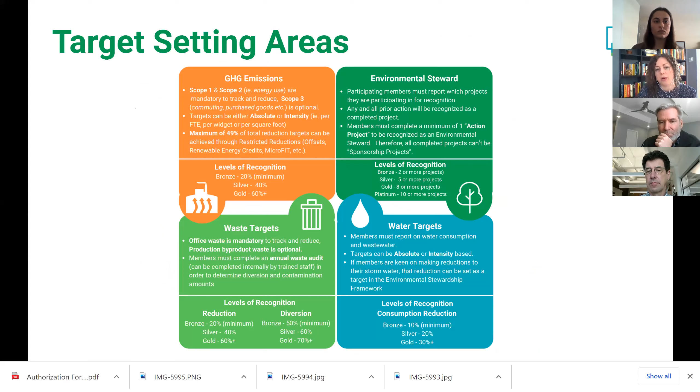We've gotten a lot of funding to help organizations implement sustainability projects. We've completed 50% of our membership's baseline setting, which is basically our biggest goal is to help people track their emissions and set a baseline and then improve the impact. So we're proud of that as well.

We've helped people install and implement a lot of sustainability projects over the last couple of years as well. We've started an employee and volunteer engagement program where it's a month-long deep dive into the 4 different categories, one target per week, and we help employers communicate the sustainability goals that they have with their stakeholders.

What brought us here today is that we implemented a green project grant program where we got some funding to help organizations with their goals. And then we were able to give out the money and the opportunities, which included 2 water conservation blue roof feasibility studies. And we chose Pillar Nonprofit Network and the London Food Bank to receive those studies.

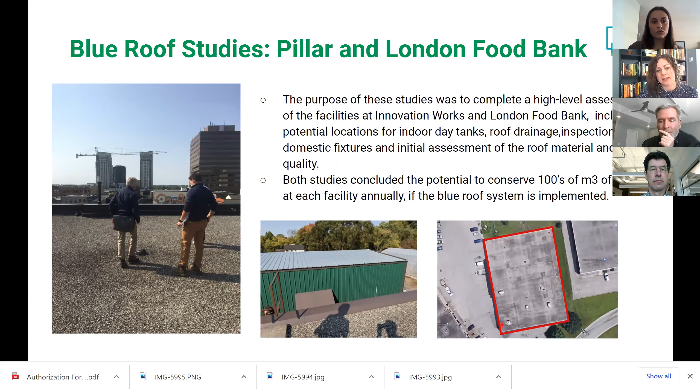So we did have these studies done, and I'll let Bruce talk more about those. But that's where we were at with our water program. So if you'd like to follow any of our projects, you can check us out.

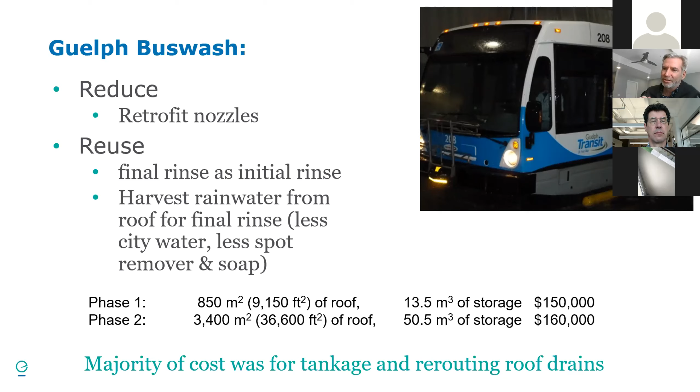When you're storing on the roof, you can actually get it to go down one drain instead of all the drains to where you need it. So you need less piping indoors and less tankage. It's an opportunity to reduce a lot of the cost of rainwater harvesting.

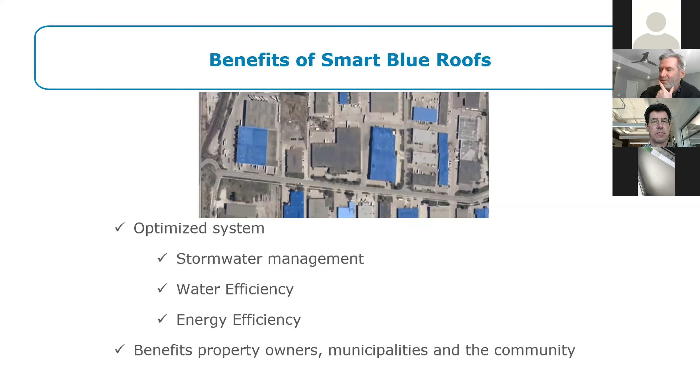So here's where blue roofs - and I'm going to use Credit Valley Conservation as a case study to explain some of these concepts. There's potential stormwater benefits, water efficiency benefits, even some energy benefits, and I'm going to go through a bit of that. As a starter, interestingly, the Intact Centre is funding part of that demonstration project that we're doing for CVC, actually building a demonstration one there.

Why is the insurance industry interested? Well, the insurance is interested because the leading cause of personal claims is now water damage, and it's doubled in the last decade. Here's a chart on it. What's happening is we're getting larger storms more often - you might get a 100-year storm every few years, so it's not a 100-year storm anymore, it's just a storm. So what happens is all of our infrastructure was designed based on what we used to get. Now we're getting maybe the same rainfall, but in more intense, shorter periods, which overwhelms the distribution pipes, collection pipes, and results in flooding.

So interestingly, if we can slow that down so it's not going down the drain during the storm, then rather than digging up all the pipes, putting in bigger ones, or taking somebody's land and building a big pond on it.

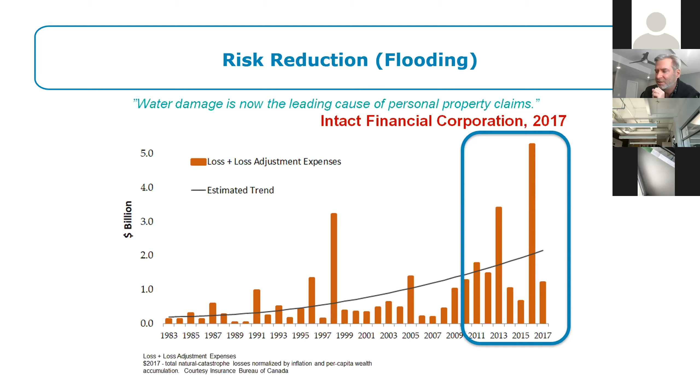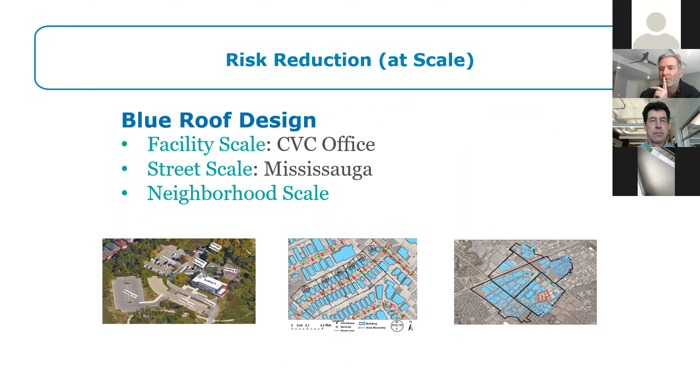Just by lower cost infrastructure improvements, we could potentially address the problem at the source. So we're assessing for them, and we're actually building it on their head office, shown in that picture on the left. We're also evaluating it at a neighborhood scale, where 13 businesses are sharing the same overloaded storm drain. What if we were to collectively work on those? Can we address that at a community level? And then you could look at even larger scales if you want.

There are two different ways you can go: one is called passive blue roof and one's active. Generally speaking, passive is you're just slowing the water down going down the drain, so it's not going down at the same pace, and it builds up a bit on the roof during the storm, continuing to drain afterward, and generally over 24 hours it's all gone. Active blue roof is where you literally store it on the roof. You put a valve that closes on the drain, and we'll get into what that entails for roof design. But literally, you're storing it on the roof, and that gives you a lot of flexibility.

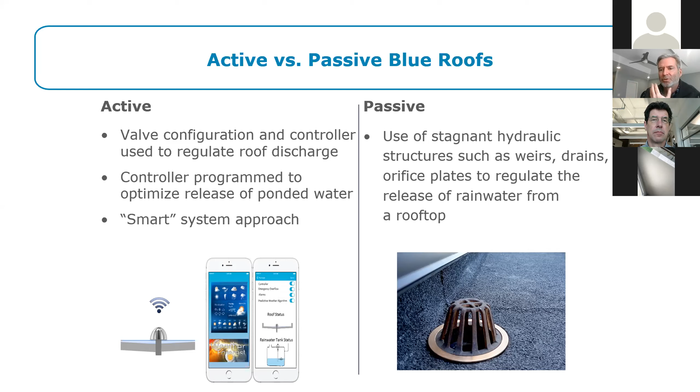First of all, you get a lot more water to use. Second, you can say, hey, there's a storm coming, let's make some room on the roof. We're going to open the valve and drain the roof, right? So it gives you a lot of flexibility. They call that an active or a smart blue roof.

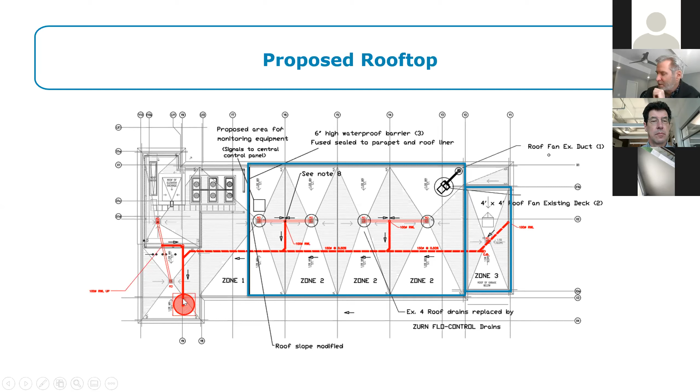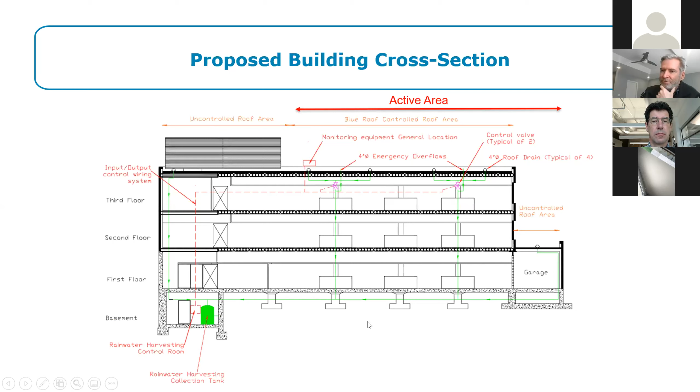And it's going to end up in the storage tank in the basement. So here's a side view: basically you've got some control valves here, which allow you to keep the water on the roof until you want it. Here's your rainwater harvesting tank in the basement, which already exists—they've already got their toilets tied into it. This would give them more water so they'd have to add less city water to make up the difference. As this tank calls for water, it just opens a valve, tops up the tank, and keeps going. And if you need to clear the roof, you can just open it up and drain it to the town's storm drain before the storm occurs, when there's more capacity in those pipes.

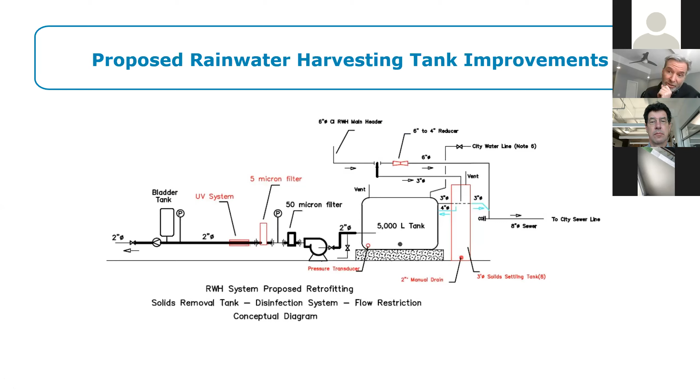As for the water itself, it comes in, you might settle out some debris first and then store it. Before you use it, you might treat it with ultraviolet light or chlorine or something like that, then use it in the toilets. Interestingly, we don't have to make drinking water out of it—we just need to make toilet water, so it's a lot easier than the level of treatment you'd need otherwise. This is in detailed design right now, and it'll be tendered soon for construction, most likely this year.

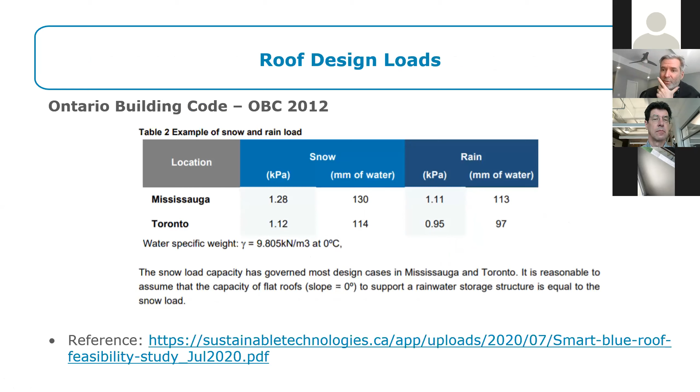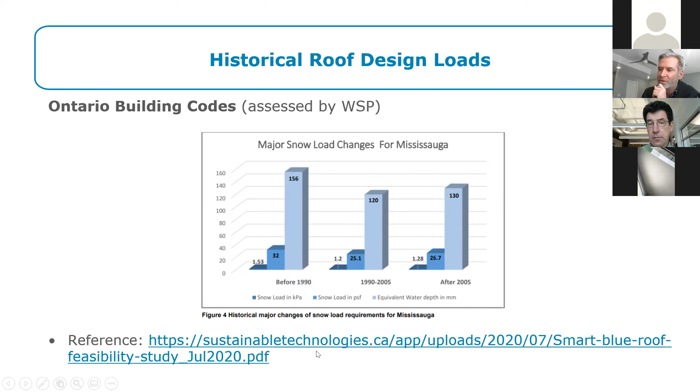Basically, 120 millimeters during this period is the low point—it was actually stronger before the 90s. So even 120 millimeters, 12 centimeters, means 10 centimeters of water would be less than the building code allows. So what happens is, in the wintertime, we would actually drain the roof, so you've still got your snow load capacity, but during the shoulder and summer seasons, you can store water. And if there's a big storm coming, you can just make room on the roof. There's a nice report, and in this recording, hopefully you'll have slides you can click on to get to the site—this is the feasibility study for that project that Credit Valley Conservation made.

Another consideration would be mosquitoes. Aren't we going to grow mosquitoes on the roof? Anytime you've got ponded water, right? Even in your own backyard you want to be careful of this. So you have a screen on top of your rainwater barrel, that kind of thing, to avoid this.

If you look at the life cycle of a mosquito, the eggs can last for a long time, even in a dry environment. Once they see water, within 2 or 4 days they hatch into larvae. The larva has to be in water, and it takes 5 days before it becomes what's called a pupa, and then another 3 days minimum for it to become a mosquito.

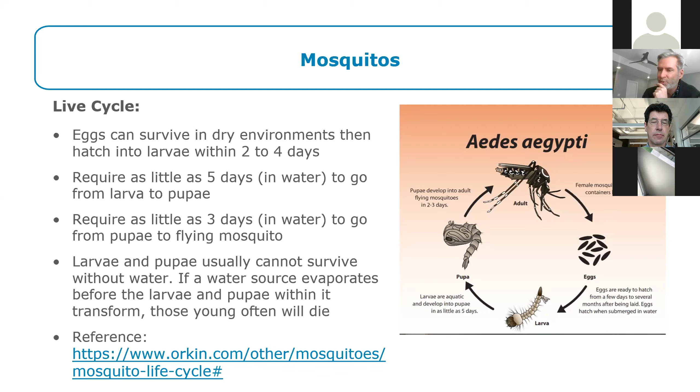So there's 8 days. If we were to ensure the roof drains at least once a week - let's say every Friday at 5 o'clock you open the valve and drain the roof, let it dry out for a day or more, close it again and start storing - any larva and pupa would be killed. It's kind of where that goes.

Another interesting thing is cooling. If you go on a roof in the summertime and touch the liner, you may actually burn your hand, that's how hot it is, because the sun's beating on it. If you go to an outdoor pool and put your hand in, it's not going to be hot, it's going to be like low 20s at best, because once you get above that you get more evaporation, and that evaporation cools the water down.

So you could potentially keep your liner closer to 20 degrees than 40 degrees or whatever it's going to heat up to, which I think may have some benefits in terms of the life of the liner, because the cooler it is, the plasticizer and everything in there would last longer, in my opinion.

But also interesting for the building: if you have a 40 degree Celsius liner and a 25 degree building, the heat is going to go from that liner through the roof into the building. If you have a 20 degree liner and a 25 degree building, the heat's going to go from the building to that water, so the opposite direction.

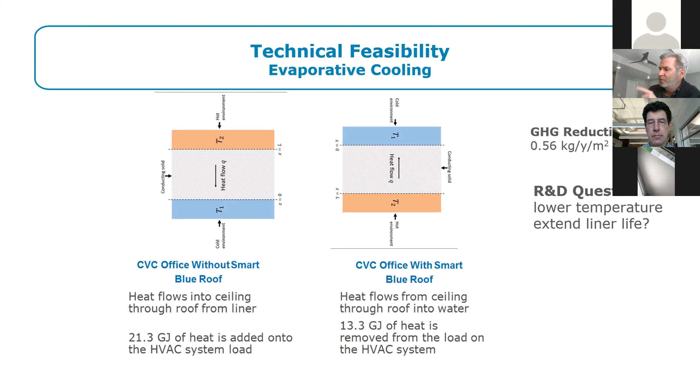If you look at that swing, 21 gigajoules one way and 13 the other, that comes to 34 gigajoules of energy. Your building's refrigeration or air conditioning system is fairly efficient, it might move 3 units of energy for every unit of energy you put in. So if you did that, it's still a certain amount of electricity you'd save on your HVAC units - not a lot, but it might be significant.

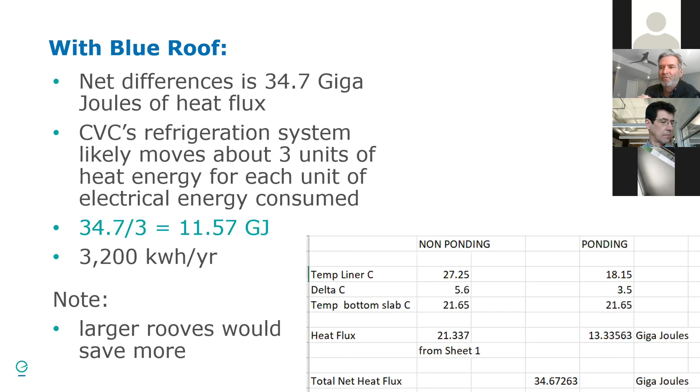And also, if you don't have refrigeration, it might give you a little bit of a cooler environment for your workers in your building. The larger the roof, the bigger the benefit.

Now some specific case studies from London. The food bank is in London, and they actually have a garden, which is really nice, planting trees and that kind of thing. This is their roof - they have a little rainwater harvesting tank in the top right there, and they fill it up about a cubic meter a week. They bring a truck for that gardening, so they're paying somebody to haul that in, which we could potentially avoid if we harvest their own rainwater.

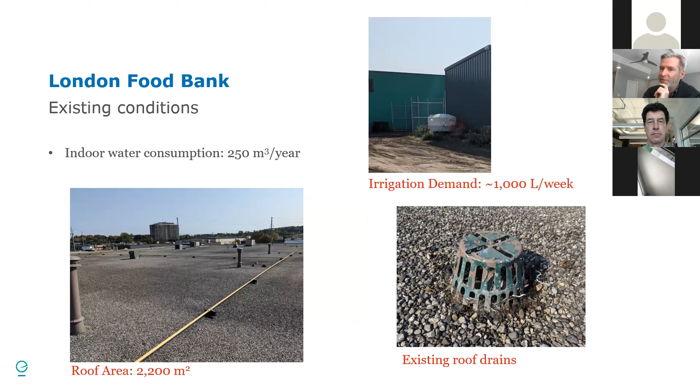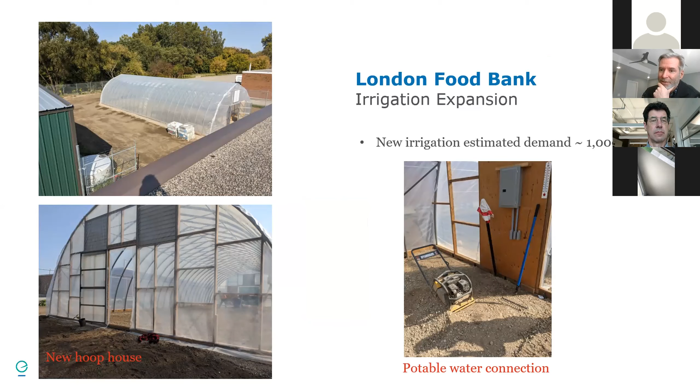Also, they're building this hoop structure, an indoor greenhouse. Rainwater is perfect for growing plants, so what if we were to harvest that? Basically what we want to do is, there's the two roofs there - the north roof, that's that little tank I showed you. If we put gutters on here, we can have one tank here, another one here, because they also have trees they're trying to do out here, basically just harvest the rainwater from that peaked roof.

The main flat roof here isn't good for a smart blue roof yet because of the type of material, so we're considering a passive blue roof, basically a slow release, capturing some of these drains inside and getting it over to that greenhouse so they can have a storage tank there that fills up whenever it rains and use it on the plants.

On the right here is a software program we use called Connect the Drops to model rainwater harvesting systems, and then we jury rig it to also address blue roofs on top of that. The blue bars show how much of the actual water demand they can satisfy, and the hatched part is what still needs to be met with other water sources.

Such as city water. Interestingly, before you start reusing water, it's better to reduce it in the first place. By changing the fixtures in the food bank, we can actually save 100 cubic meters a year of water, whether it rains or not. On top of that, if you put a passive blue roof, you'd save an additional 70 cubic meters. If you're able to do an active one later, say if they replace the roof liner, you could get in the realm of 230 on top of the 100.

Innovation Works is in downtown London, 201 King Street. It's a nice old building, 4 or 5 stories tall. Similarly, its roof isn't ready yet for a smart blue roof, so at this point we would only consider a passive blue roof. Later on, at some point in the future, you may put on a modern roof liner, and at that point you may want to consider converting to an active blue roof, but most of the infrastructure in the facility would already be set up.

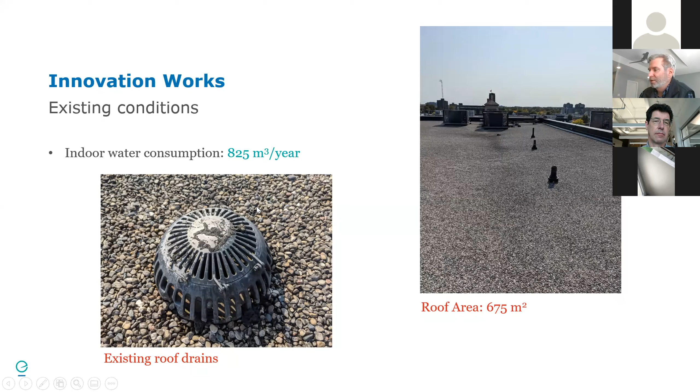Indoor water consumption, they're presently consuming that much a year, but through conservation we could save about 300 cubic meters a year with fixtures and that kind of stuff. Then if you do a passive blue roof in those two locations, you could save about this much. And if you convert it to active later on, you could save a total of that much more on the blue roof reuse side of things.

From a stormwater modeling perspective, this is the instantaneous amount of rainwater going down the drain during the storm that can be avoided, which has a lot to do with sizing of the storm pipes and flooding risk. Through water conservation there's this kind of savings available through the buildings, and through reuse with the blue roofs there's these kinds of things available, plus you get a small amount of savings on cooling in the summer months.

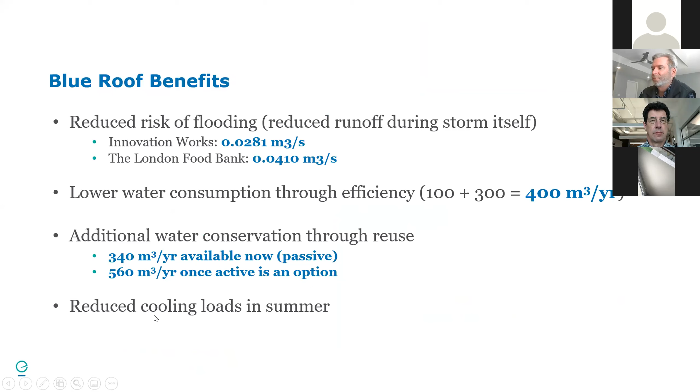So what I want to do is throw it open to Q&A.

We've got a couple of questions so far in the chat for you, Bruce. Some you might have touched on, and I think one of them might be better suited for Richard, but we'll go through what we got. The first one was, how large and how small can a roof be to be supported with this system?

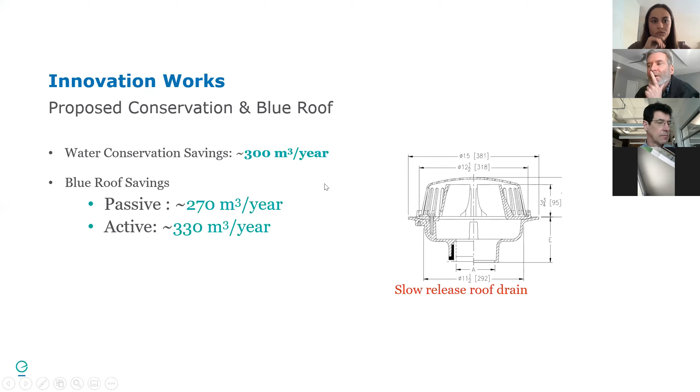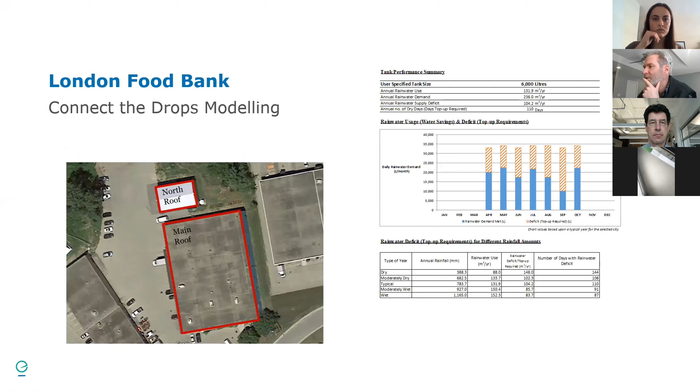Well, our own office is 5,000 square feet, and we're going to put one on our own office in Elmira, and we already have the rainwater harvesting like I showed you. So you can start small. The drain pipe literally went through my office, and we just started by buying this tank and elbowing in a tank and overflowing down the same pipe. That's pretty small, and we didn't even get the pipe at the back, we just did this one right here, and just that alone was enough to keep this wall going for 5 years. So you can start pretty small, and it will a lot depend on your roof liner.

Basically, the old type of roofs are tar and gravel and different things like that, you don't want to store water on there. What you need is a modern roof where they put on the plastic liners and weld them together, so literally you've got a swimming pool liner on your roof. If you're going to store water, you need something like that. In our case, we just have to wait until COVID's over and they replace our roof liner, and then we'll have a smart blue roof on our own roof.

In that case, all I'll need to do is buy a valve, put it here, and store the water on the roof until I want it, then let it down to this tank to reuse it. And if a big storm's coming, I'll just empty the roof. So you can start fairly small—even at the food bank, that roof's fairly small, and it's a peak roof, which you don't want to store water on.

The next question was, how can you ensure either your tank overflow or the flow rate is sufficient to deal with the worst storms? I think you kind of touched on that, but...

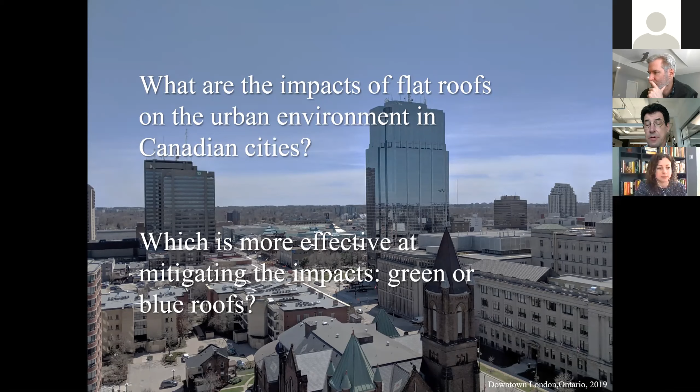The humble flat roof does a lot of things for us. Especially in our climate, it resists the wide range of temperature and precipitation we get, and keeps us shaded from sunlight. All these services have impacts on the urban environment. A dark roof in the summertime will heat up, as Bruce was saying, and radiate heat back into the city—that creates what's called the urban heat island effect, which is what makes cities so hot in the summertime. On the other hand, we're using more and more white roofs, so-called high albedo roofs, which reflect light.

That helps reduce the heating effect, but it can cause glare problems for neighbors.

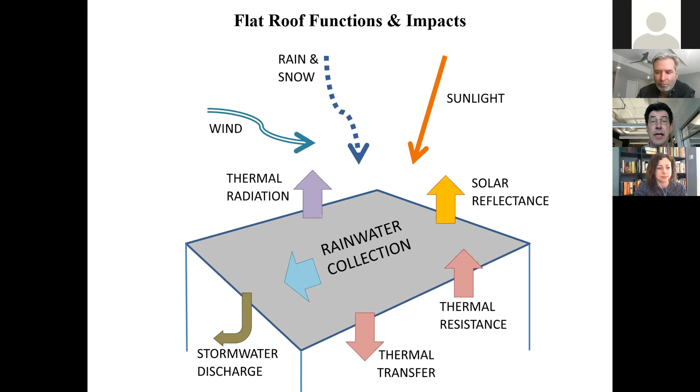Fortunately, we have a large selection of strategies to address this. So what I'm hoping to do is put today's topic of blue roofs into context of that portfolio of things we can do to mitigate these impacts. They're part of what are called low impact development stormwater management.

A green roof has a lot of other benefits, extremely effective from a stormwater management point of view. All of those are things we can do on a roof, which is what I looked at in particular. The rest of those strategies are all on the site: infiltration, bioswales. There's a number of other tools we use on our project sites to further mitigate stormwater.

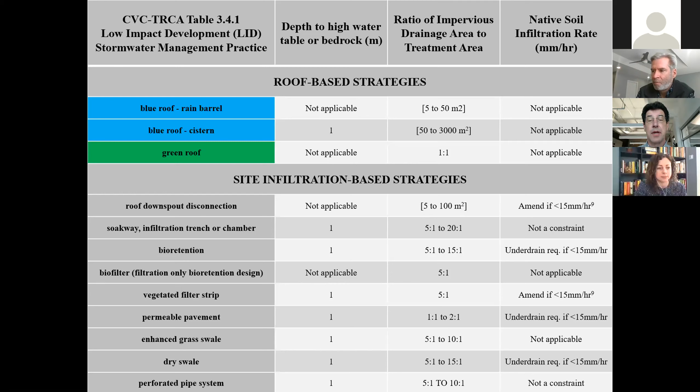As Bruce alluded to, there's a difference between the water quality needed for flushing toilets versus drinking water, and in all our projects the water we use inside is strictly for toilet flushing. If we do that, you'll see some projects perform comparably to green roofs in terms of the amount of rain they keep. A few don't do as well, because they have relatively few people under the roof, or they're intermittently occupied. So some of our public buildings aren't a great choice for blue roof systems, and many office and retail buildings don't have as high a concentration of regular water users as some of these other building types. So that's where some fit and some don't.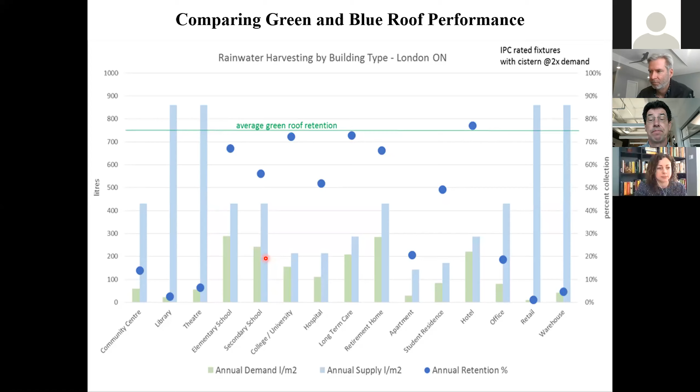One of the big benefits of green roofs is to create natural habitat on a site for pollinators, and even birds use them for nesting. Blue roofs, not so much a reliable solution for that. On the other hand, blue roofs conserve drinking water, either for irrigation outside, for toilet flushing inside, and there are even examples of using it for all the water needs inside a building.

They're also much more compatible with solar photovoltaics because you don't need to access the roof to maintain the green roof if it was underneath the PVs.

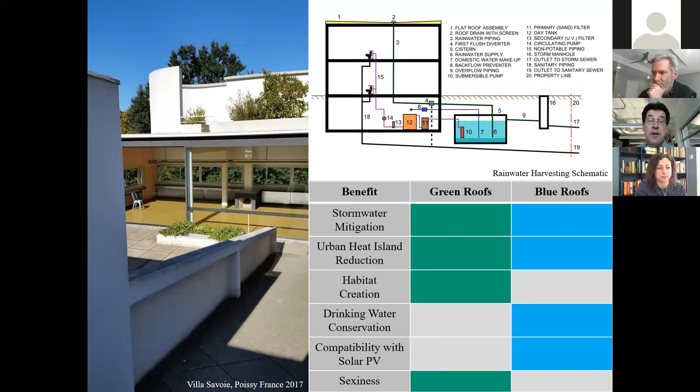So the answer to that question, what's more effective, green or blue roofs? It depends. This last slide is really the key outcome of my work, to help designers like me decide what is the best fit, and to help advise our clients what's the best fit for their project. So you have to start with a philosophical decision that you're willing to consider stormwater management for your project.

Second question is, have you got funds available? These strategies do cost money. It is an investment in the performance of your building. But there is a solution even if there's no real funds available, and that's the system Bruce alluded to, a so-called passive blue roof, or what we call flow control roof drains.

You just slow down that heavy rate of stormwater over the course, usually 24 hours. You have a restriction on the roof drain that slows the flow of water down for a day, and that reduces the worst of the impacts.

However, for those clients that are willing to invest, we find for a large project these systems are about 1%, in terms of order of magnitude of the project cost. So it's not insignificant, but it's still a minor piece of a big project. So we have some funds to invest.

There's 3 interrelated decisions, almost like a voting, that I've identified. Number 1, is the roof surface visible? And if it is, and we can see it from the building or from the neighboring roof, that would favor utilizing a green roof and taking advantage of those wonderful aesthetic benefits that green roofs have.

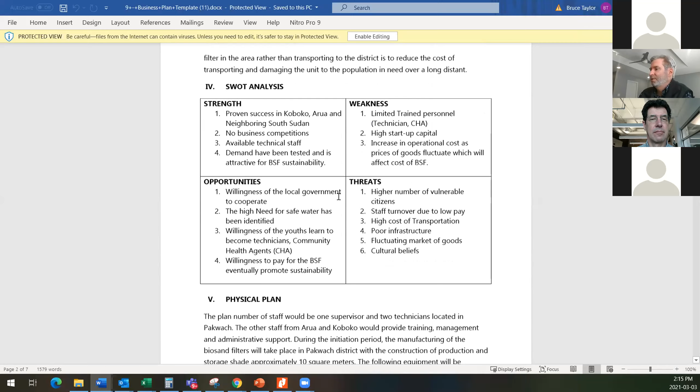So you can use it to help manage your projects. It gets to this level of detail, and then the business plan. Here's a template. Just start, do whatever you want. It's your template, you can do whatever. But here's kind of a plan for starting your business, the different aspects you're going to do, what you're going to need to start up the project.

In that case, $10,000. That's what it took us in Pakwach to start the brand new project. Molds and all that kind of stuff, motorcycle, that kind of stuff. Here's their plan for how much they're going to sell.

And so what we do is Enviro-Stewards sponsors a certain number per month of price discounts. So if somebody makes less than $2.50 a day, they're kind of in very deep poverty, which is unfortunately most of the people there, then they can apply for a discount.

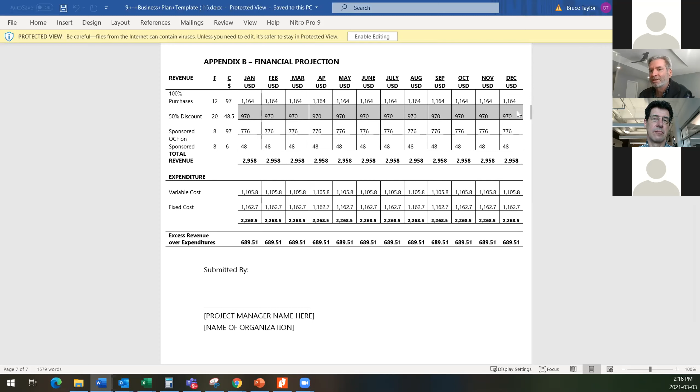And what we do is for the first year, we co-sponsor 20 a month. They can get a $50 US price discount. It costs about $100, so it would then cost them 50. The next year, second year, we do 15 a month, then we do 10 a month and 5 a month. So the project has to sell more and more at full price to do it. Anyway, they've got their plan for the year laid out there.

And so that's all module 1. Module 2 is how do you actually make these things? Each step, you click on any of them, and this is literally how you make the filters.

Module 3, we're still working on, it's coming soon, but how do you actually run a self-supporting business? So Richard, what did you learn? Me, what did I learn? I didn't go to business school, but if you're going to survive, you've got to at least break even. So how do we get those things and codify them into a business plan?

And interestingly, we use that board game I mentioned. So we integrate the problems from real life into the board game, so they encounter them during the game, which is a lot safer than encountering them in real life.

So let's say we're playing it right now, say Natalie, Richard, Marianne, and myself. I'm the moderator, you guys are literally playing the game, and you're literally the water team. All you do is decide what you're going to do that week. You can decide whatever you want: I'm going to sell filters, I'm going to make filters, I'm going to install filters, whatever it is. And I just track the outcome on your cash flow and on the people who got safe water.

And after 6 months, you're judged not by how much money you made, but how many people got safe water, because the better you organize yourselves, the more people end up with safe water. But if you ever get to $0, you're also out of business. And the interesting part of the game is after it's over, we have a debrief where you guys would say, well, next time I'd do it differently like this. The people watching would give their input, and then the person moderating, who's been holding back the whole time—because if they give advice during the game, you never learn it.